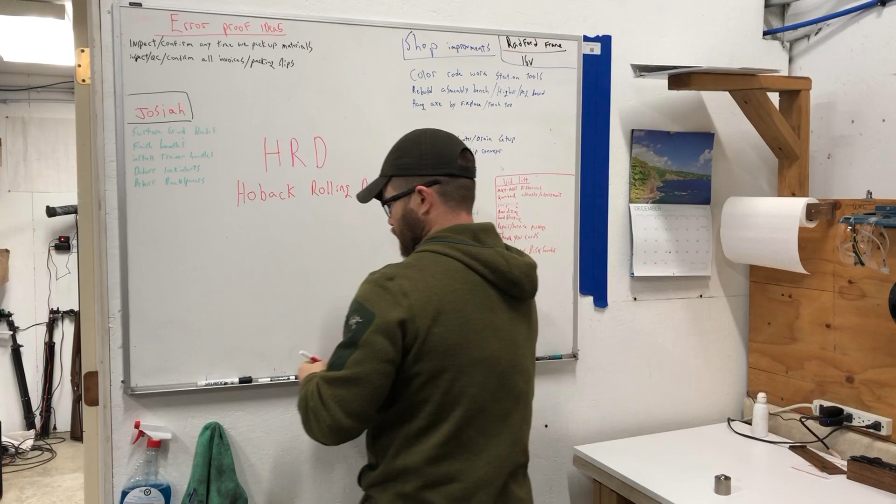Just wanted to give you a rundown on what the HRD is. That stands for Hoback Rolling Detent. Now, if you have no idea what that is, then I guess I'll have to explain it to you.

I invented the rolling detent for the folder back in 2003, 2004, somewhere in between. Actually based off the tip of a ballpoint pen, of all things. Just happened to be drawing some pictures and noticed it and thought, why does a detent on a folding knife need to be a fixed press fit ball in the lock bar to prevent the blade from opening unintentionally, and then also to raise the lock bar off of the blade when it opens to reduce friction.

So I started coming up with the designs. The first thing I actually did was pull the tip out of a ballpoint pen and press fit it into a frame. Worked like crap. But from that point, I'm like, all right, you know what? This kind of proves the idea. It'll actually work. Went around the country looking for places that could do this. A lot of the Swiss turning places just couldn't hold the tolerance that was needed to have a threaded set screw with a swedged ball bearing.

Worked with a whole slew of different people that really helped me figure out what to use, where we could have things made, maybe potentially places that make something that will work in a similar fashion that's already produced, because that's usually the cheapest option. Ended up finding a place in Japan that could make them for us, and we've been using them ever since. Excellent source, high precision, so it works great.

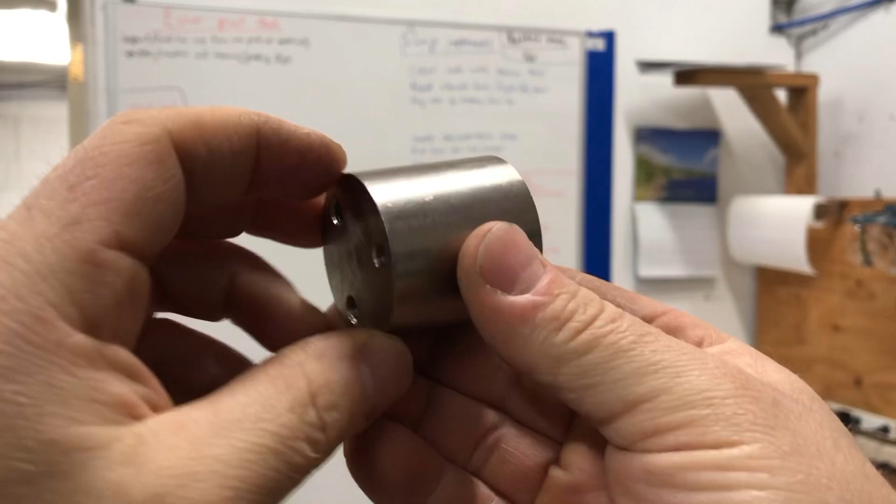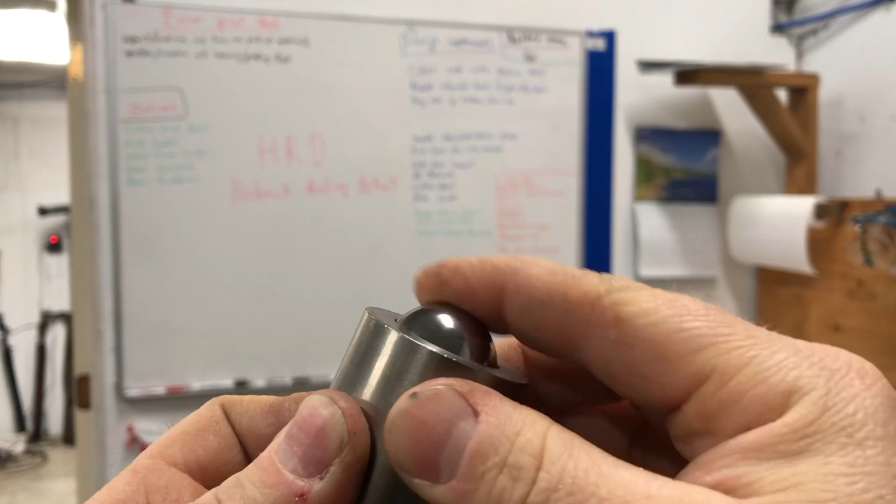So we've had prototypes made of different varying designs for different features. This is a giganto-sized one. I'll come up to the camera here a little closer so you can see. This obviously is not a set screw. This is just a press fit or a flange bolt mount. And then you have a rolling bearing in here. So this is the simplistic way to show this.

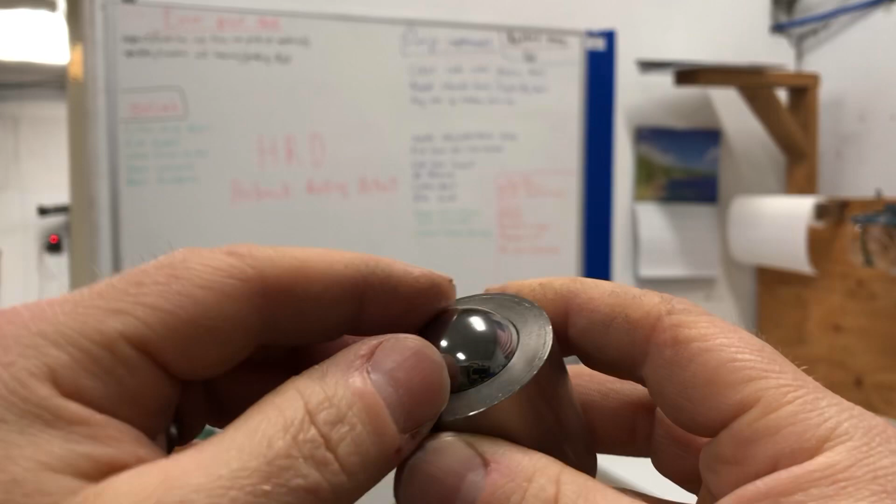Our designs are actually M3 by 0.5 diameter on the threads, and then the ball is actually swedged to where it still rolls, but it's still tight inside the bore. This one's actually got a sleeve that press fits on the outside like a typical roller bearing is. A lot of the time the application for something this size would be on a conveyor system or an automation system in a big factory, and you'd have a whole slew of these laid out to where pallets and stuff could roll over the top of them.

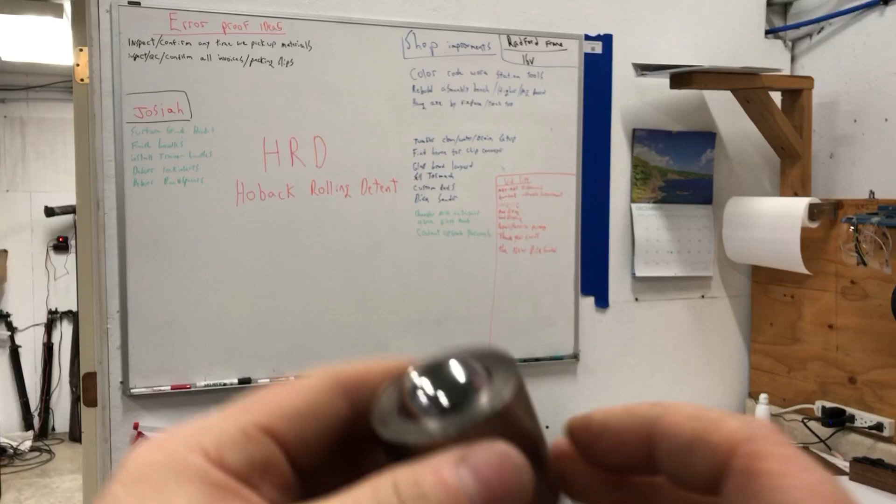The actual HRD is very small, but I'll draw it on the board and show you guys what the internals look like. So you start with a small shaft that's threaded. Like I said, it's M3 by 0.5. It's got a 1/16 inch hex broached into the bottom. Threads over here are M3 by 0.5. And then at the top, it comes up to a slight point, and then you have a partial cup. And then you have your bearing inside.

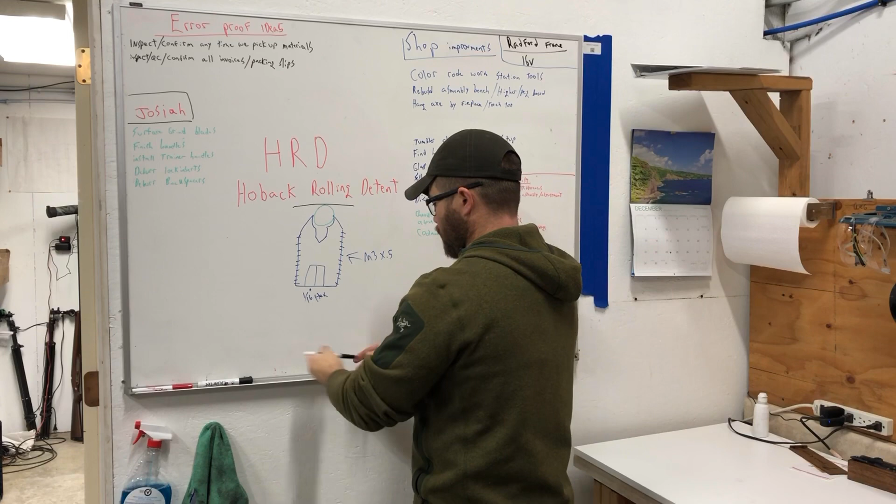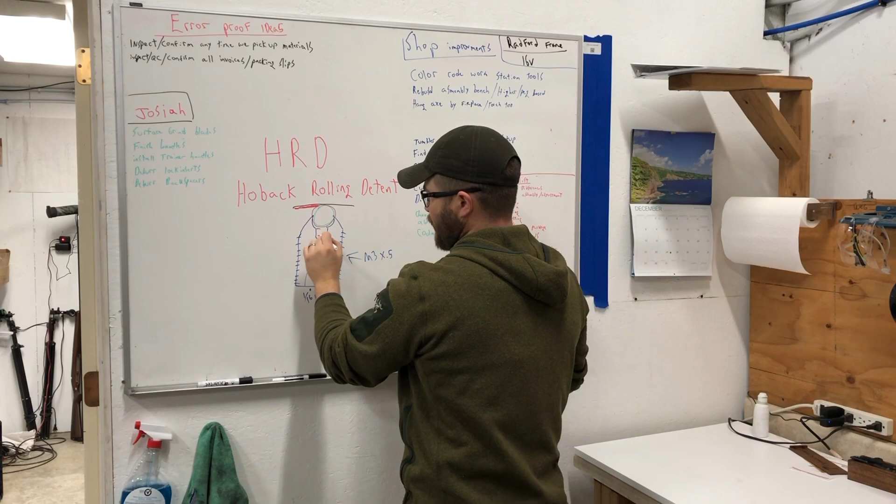So the reason I chose this setup was twofold. The precision in which we could have it made, and then also the fact that when you roll this bearing over a surface and you add oil to this surface here, just pretend oil obviously, when the ball rolls, the oil will wrap around the ball, but it'll also skim off on the bottom and start to fill this small reservoir full of oil.

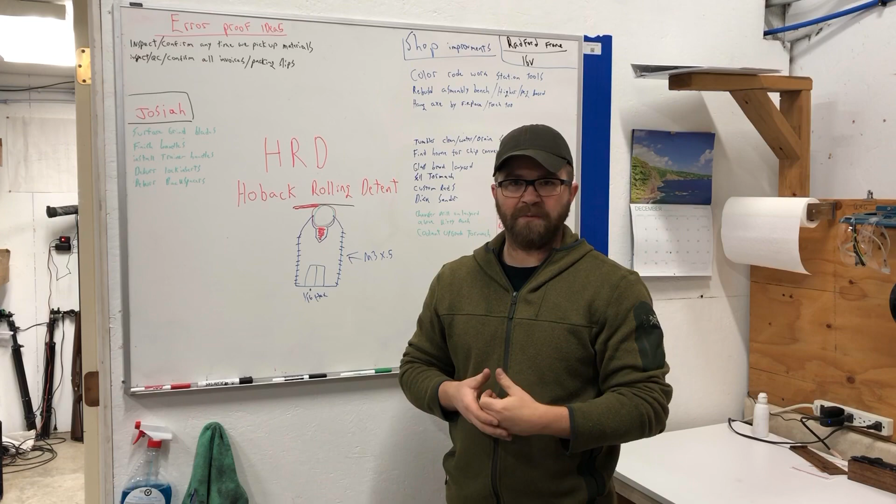So what ends up happening is the HRD becomes self-lubricating to a degree for a limited period of time, usually lasts about a month, and then you'll have opened the knife enough times where the oil has dissipated enough that you'll need to re-oil the detent track a little bit. One drop of oil usually does it. And that's the HRD. That's the Hoback Rolling Detent.

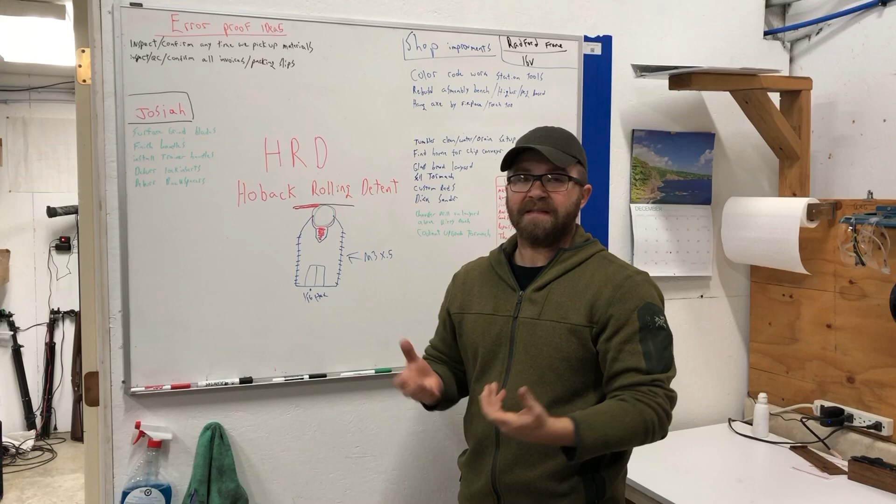I had a provisional patent on it for a while. Let that lapse. I let a lot of people use the idea as long as they just call it the Hoback Rolling Detent. Typically people just ask for permission. Quite a number of knife makers out there are using the HRD now, so just pay attention to it. If you happen to see a rolling detent on a folder, chances are it's a Hoback Rolling Detent, or they're just not wanting to pay the tribute, even though it's kind of an open source sort of thing.

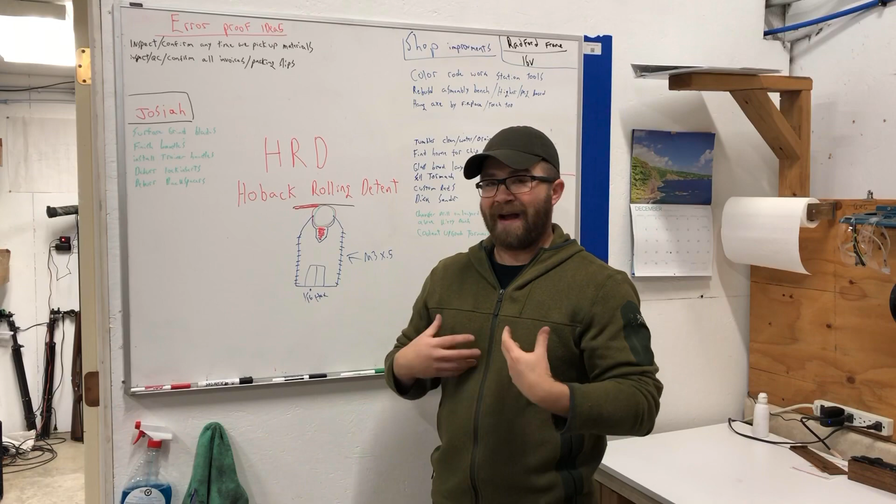But yeah, that's how it works. Some of the reasons why I feel it's better than a standard detent is that, I'll erase this real quick so I can draw lots of characters.

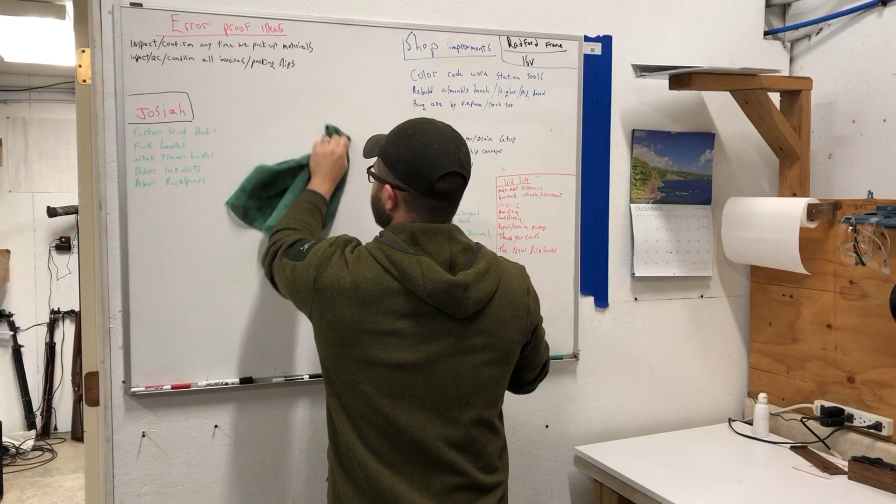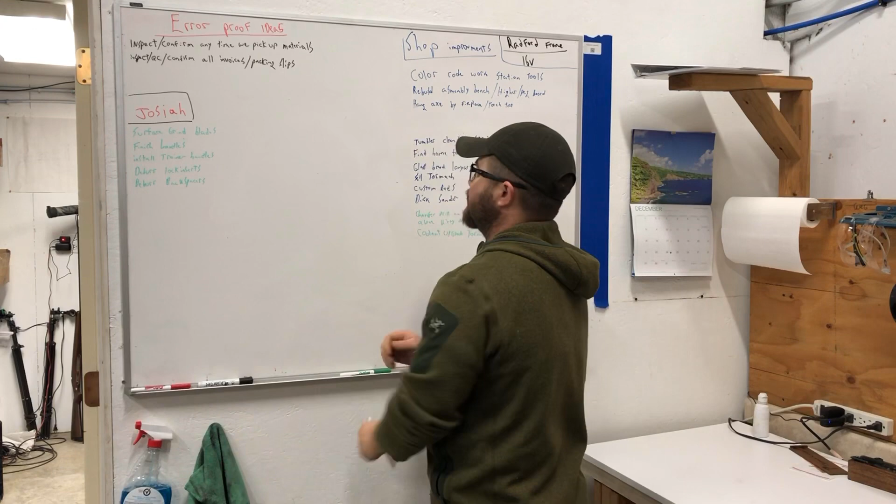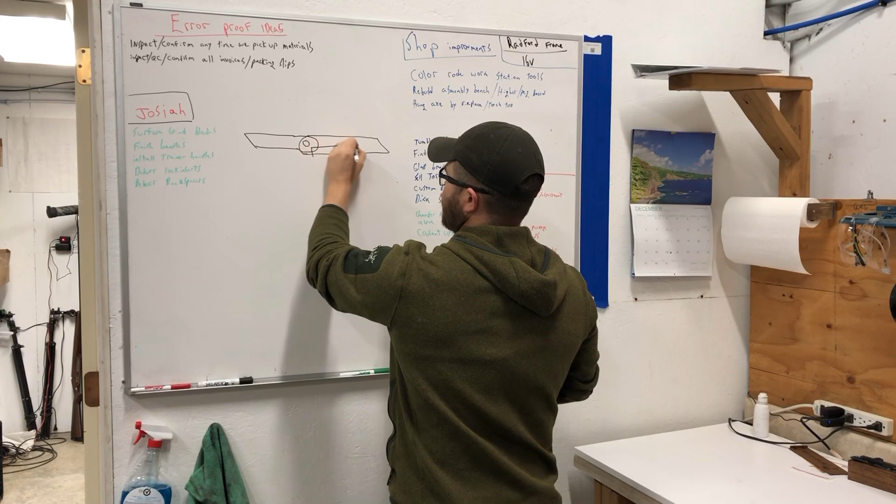So I'll do some very crude drawings here. Your standard detent. Here's your frame. Your detent will ride on your lock bar, say there. You would typically take a 1/16 or 5/64 or 3/32 ball bearing, ceramic or stainless steel, whatever, and you would drill a hole that's slightly undersized, about a thou undersized, 5/10 undersized in your frame, and then you would press fit that ball bearing into the lock

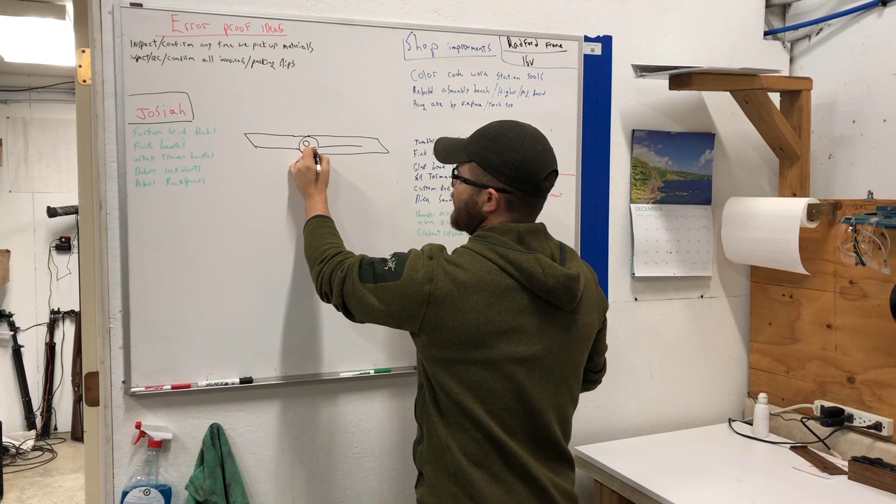bar. So then it's stationary, and then when you close the blade, that detent rides along into a detent hole until the blade closes. So basically it just drags along. Works really well. You can make it very smooth. It has some advantages, some disadvantages. I'm sure as you found they do wear out.

You send a knife back to a knife maker, they end up having to punch that out, and hopefully they can press in another ball bearing if it hasn't stretched the liner out enough to where it will hold another bearing again. If it has, then they have to peen the hole closed and then press in a new bearing. It's got some issues.

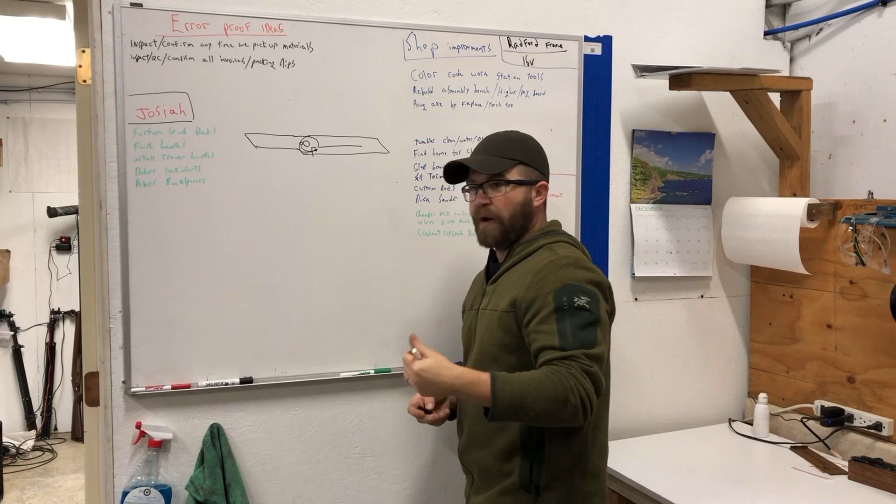So my kind of reinventing the wheel, so to speak, is that now you don't press fit this in, but you thread it in. 1, it's replaceable. 2, it's slightly adjustable for detent pressure. And then 3, it rolls along this edge. It creates a smoother feel. It does feel different. There are some tricks that you can do to a fixed detent, like flattening the bottom of the detent ever so slightly, that'll make it quite a bit smoother.

With a HRD, it rolls along the surface. So it does have some downsides. Your surfaces do have to be a little bit smoother than a standard detent. Otherwise, it'll feel like a car tire rolling over a bumpy surface. So if it's not smooth, you can feel those bumps a little bit more than if you had a fixed detent with a flattened bottom on it. But other than that, you have exponential life compared to a standard press fit detent.

Of all of the years that I've been doing this, since 2003, 2004, I believe in total I've replaced maybe 3 to 5 HRDs. And to put that into perspective, we've probably sold 7,000 or 8,000 folders with HRDs in them. Potentially more than that. I'm just guessing at this point. We've done so many folders I don't even keep track. So 3 to 5 out of all of those is pretty awesome.

Now to expand upon that even a little bit further, of those, let's say there's 5 that I had to replace. I would venture a guess that 3 of those were due to full-on neglect, like never been oiled, never been bothered. And the cool part about the HRD is that when it fails, it does not fail in a spectacular fashion. It fails into the default mode of a press fit ball bearing detent. So the ball will seize inside of the set screw body, and then it'll just act like a normal detent. So its failure mode is still a function mode, which is fantastic.

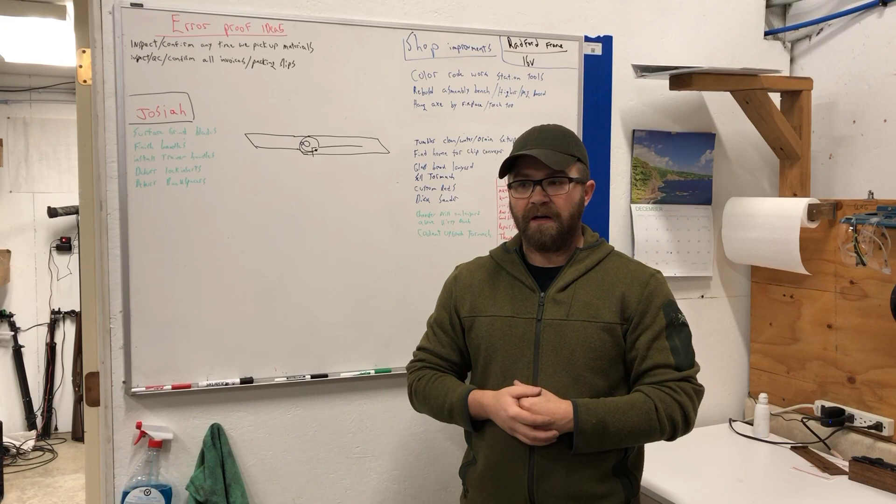So yeah, hopefully you guys enjoy this little insight into why we do what we do, some of the stuff that we do, and hope you appreciate it.